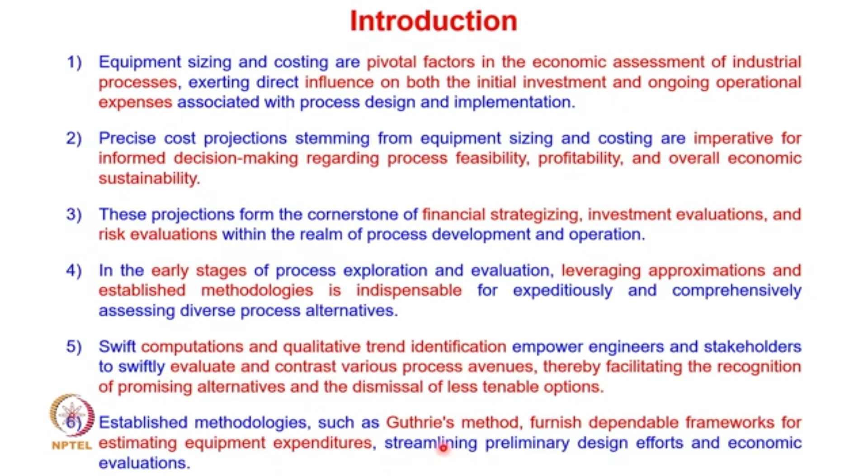If you look at the different estimates, preliminary design usually has around less than 40% error. This is attributed to the limited level of detail available during preliminary design. Despite this, it is important to have, primarily because even the order of magnitude estimate serves as a valuable tool for assessing the feasibility of various process alternatives. So even though preliminary design has almost 40% error, it is still important.

As the process design progresses into later stages, a study estimate is utilized. Study estimates have an error of less than 25%, giving refined cost approximations with a reduced error margin. This estimate offers greater precision, primarily because of the acquisition of more detailed information during the development process.

As we further go ahead in the advanced stages of process development, we have a preliminary estimate, where the error is less than 12%, reflecting a higher degree of accuracy. This indicates a more precise assessment of the capital cost based on comprehensive design data.

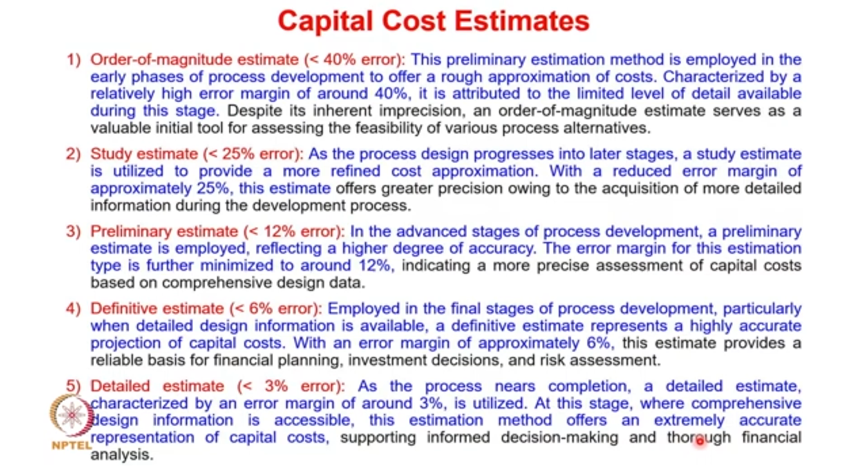As the process design is more or less complete, a detailed estimate is characterized by an error of less than 3%. At this stage, comprehensive design information is accessible, and this estimation method offers an extremely accurate representation of the capital cost, supporting informed decision making and thorough financial analysis.

Equipment sizing is crucial for determining the physical attributes and specifications of various process units, ensuring optimal performance and cost effectiveness. Accurate equipment sizing is essential for achieving efficient operation and meeting process requirements.

There are four different types of sizing primarily taken into consideration: vessel sizing and specification, heat transfer equipment sizing, distillation and absorption column sizing, and finally the sizing of compressors, pumps and refrigeration. We are going to look at each of these four types of sizing and specification in a little more detail.

So let's look at the vessel sizing and specification. Calculation of vessel size and specification is conducted by considering various parameters. We look at the flow rates, temperatures, pressure and material compatibility. This process involves meticulous consideration of factors such as vessel capacity, height, cross sectional area and pressure to ensure optimal performance and safety.

Similarly, for heat transfer equipment, the sizing calculations are based on the heat duties required, the temperature difference present, and the fluid properties. Typically, engineers determine the appropriate heat transfer surface areas and dimensions to effectively meet the process heat exchange requirements, while considering factors such as fluid flow characteristics and thermal conductivity.

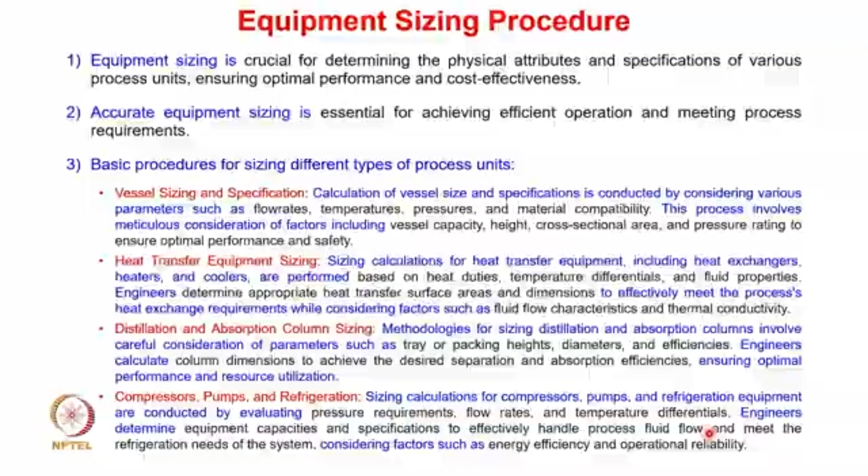So let us start with the vessel sizing. Vessels are an important component in many chemical processes. Vessels like reactors and tanks, all these we are considering as vessels, and their sizing and costing are critical for economic evaluations of the candidate flow sheet. So selecting the vessel volume is important. It is based on how it is calculated.

Usually to calculate the vessel sizing, we assume a 5-minute liquid hold up time, with an added equal volume for the vapor flows. So we get the volume equals to 2 into FL into tau divided by rho L. Here FL is the liquid flow rate, tau is the residence time, rho L is the density of the liquid, and 2 is added because we assume an equal volume for the vapor flows. So in this equation we put tau equals to 5 minutes, and based on that we can calculate V, which gives us the vessel volume.

In this case we also make different assumptions, like the aspect ratio L by D is assumed to be 4 for general costing purposes. What does it reflect? It reflects that we are considering the cost of the bottom and top caps as 4 times that of the side. So that is what we are assuming when we take L by D equals to 4.

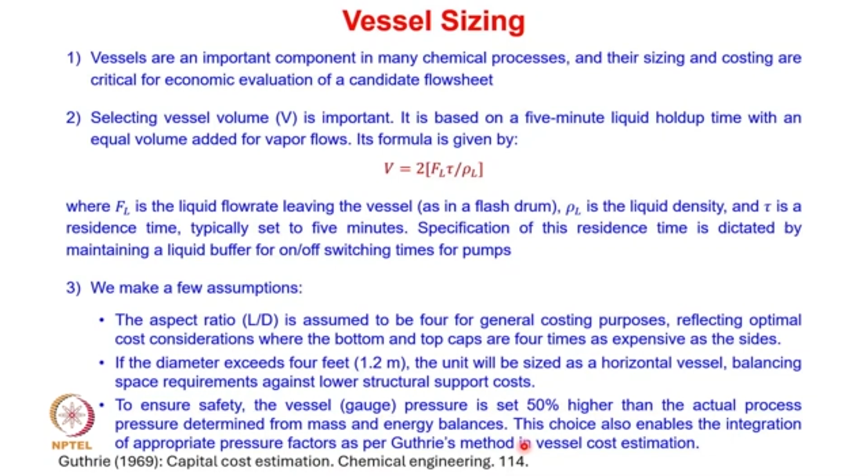For vessel sizing, consider the required material of construction as shown in the table. This particular table shows which material is most suitable for different temperature ranges, and is taken from the source, A Systematic Method of Chemical Process Design by Biegler, Grossmann and Westerberg.

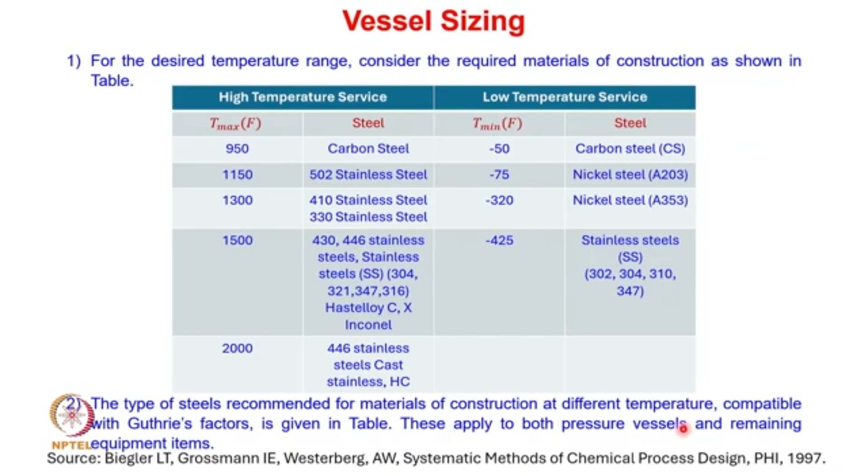When the temperature is around 950 Fahrenheit, the best material to work with is carbon steel. If the temperature is around 1150 Fahrenheit, then it is 502 stainless steel. So based on what temperature we are looking at, which material is best is what is given in this table. The type of steel recommended for material of construction at different temperatures, compatible with Guthrie's factors, is given in this table. These apply to both pressure vessels and remaining equipment items.

Whenever we are doing vessel sizing, the fundamental configuration for pressure vessels typically comprises a carbon steel vessel designed for a pressure of 50 psig, featuring standard nozzles and manways. This configuration serves as an initial reference point. Whenever we have additional information, only then do we change this specification; otherwise we start with a base design of pressure requirement of 50 psig. This reference point, for both sizing and cost estimation, can be adjusted as per specific process requirements, whenever additional requirements are there.

Vertical construction entails a cylindrical shell with dished heads positioned at both top and bottom, whereas horizontal construction involves a cylindrical shell, two dished heads, and two saddles for support. You can see that with horizontal design, these additional saddle supports are required. So in horizontal construction, the assembly includes the shell, two heads and two saddles.

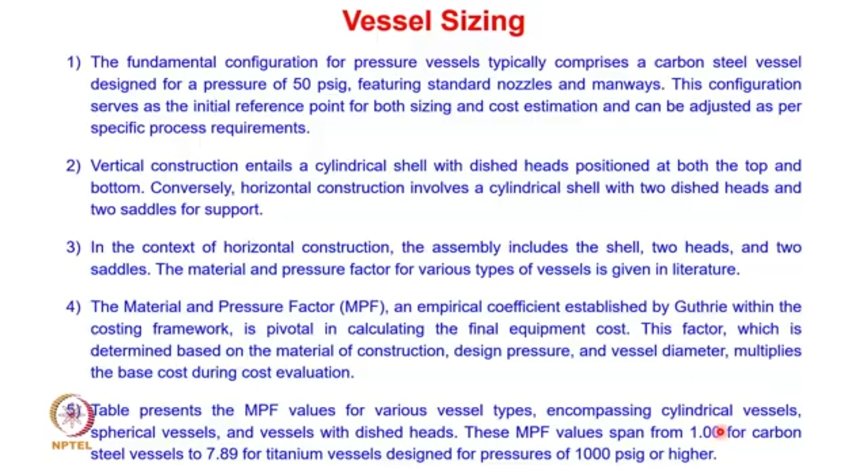If we go from low pressure to high pressure, we move from carbon steel to titanium, and the material and pressure factor increases from 1 to 7. If I am using carbon steel only as a cladding material, the increase is lower compared to when using the entire solid material. For instance, with carbon steel, the factor is 1, and as we go from carbon steel to titanium as a cladding material, it increases from 1 to 4, whereas if used as a solid material, it increases from 1 to 7.

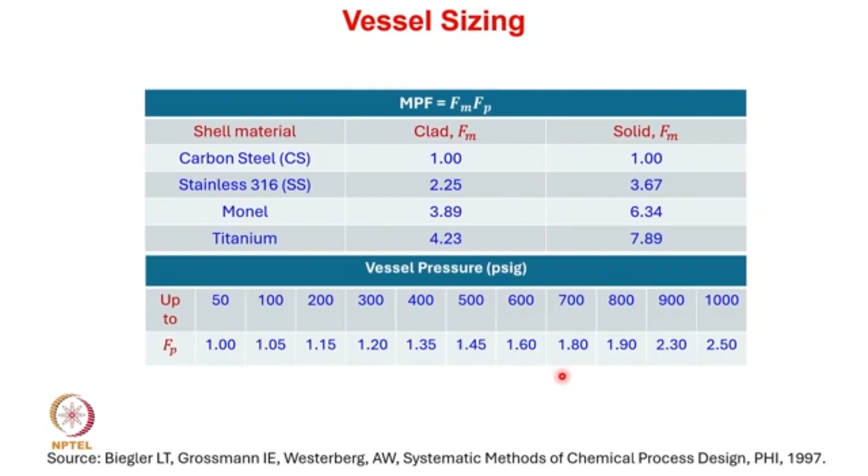Also, the pressure factor increases as the pressure value increases from 50 psig to 1000 psig. You can see that the pressure factor is increasing from 1 to 2.5, and all these have an impact on the cost calculations. Now coming back to the next type of equipment sizing.

The typical expression used for calculation here is the heat transfer Q, given as UA delta T LMTD, where U is the overall heat transfer coefficient, A is the heat transfer area, and delta T LMTD is the log mean temperature difference.

This overall heat transfer coefficient is an empirical parameter that depends on the type of fluid, the flow rates, the geometry of the exchanger, and other factors. We can calculate this U using empirical correlations, by combining the inside heat transfer coefficient, outside heat transfer coefficient, and the geometry, and use that in this equation.

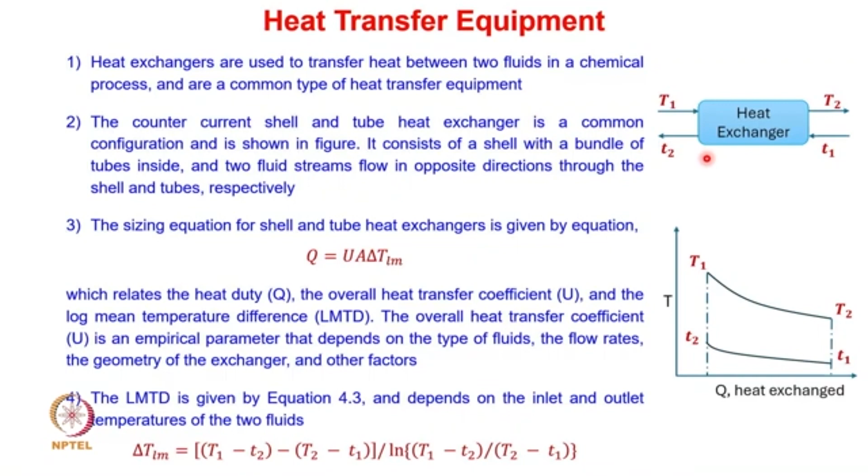The log mean temperature difference is primarily used because this temperature difference varies as we move from one end of the heat exchanger to the other. To accommodate this variation in temperature, the log mean temperature difference is used.

Another complication which comes across while designing or doing cost calculations for heat transfer equipment is whenever a phase change is taking place. Phase change is commonly seen whenever there is condensation of one fluid or evaporation of one fluid happening. In that case, we calculate the U value in a slightly different way.

In this case, the exchanger can be split into serial units, and the U values for each unit can be calculated separately. For instance, here you can see that the hot fluid is exchanging heat and then condensing. From this point onwards, the temperature remains almost the same, which is Tc. So one fluid is exchanging heat as sensible heat initially, and then there is a latent heat exchange.

Whereas if you look at the other fluid, the temperature is continuously increasing as we move from point 1 to point 2. So you can see that we can have two sequential parts here.

Just for the sensible heat transfer, this initial part we take as part 1, whereas the second part where condensation is taking place primarily, we take as part 2. We calculate the heat transfer area for both these parts, and then sum them up.

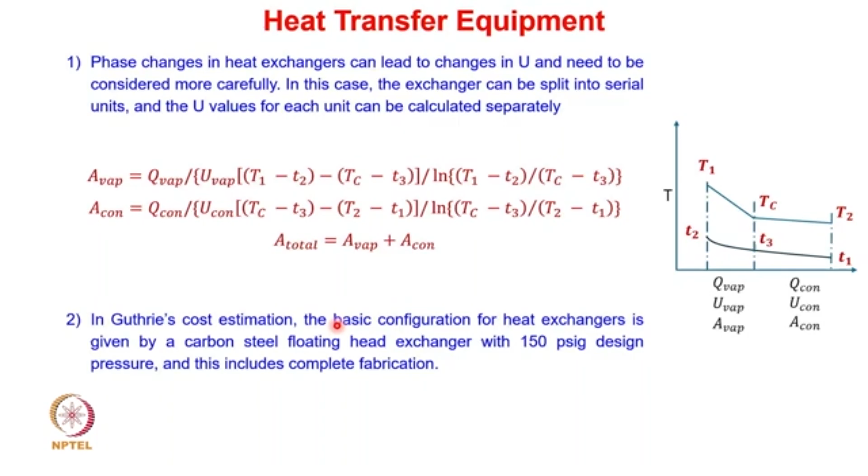In Guthrie's cost estimation, the basic configuration for a heat exchanger is given by a carbon steel floating head heat exchanger with 150 psig design pressure, and this includes complete fabrication. We can use this information in Guthrie's cost estimation method to calculate the cost associated with the heat exchanger.

Now let's extend our discussion to the next unit, which is a reactor. The sizing of the reactor involves determining the space velocity. Space velocity is nothing but how much volume we are processing in the reactor per unit of time.

Based on the molar flow rate of the liquid or gas, if it is denoted by mu, then we can calculate the space velocity using this equation.

So space velocity is given as 1 by space time, so that is given as 1 by tau. Here tau is the space or residence time, and that is given as mu divided by rho v cat. Here mu is nothing but the molar flow rate of liquid or gas, and rho is the molar density at standard temperature and pressure, whereas v cat is the volume of the catalyst. So based on this equation, we can calculate the space velocity S.

So the total volume of the reactor V is calculated considering the void fraction. Whenever we have a packed reactor, we calculate the volume V by considering the void fraction of the catalyst particles in the reactor, let's say epsilon, and the value of epsilon is typically taken as 50%. So we can calculate V as V catalyst divided by 1 minus epsilon, where if I put 0.5 for epsilon, I get V equals to 2 into V catalyst.

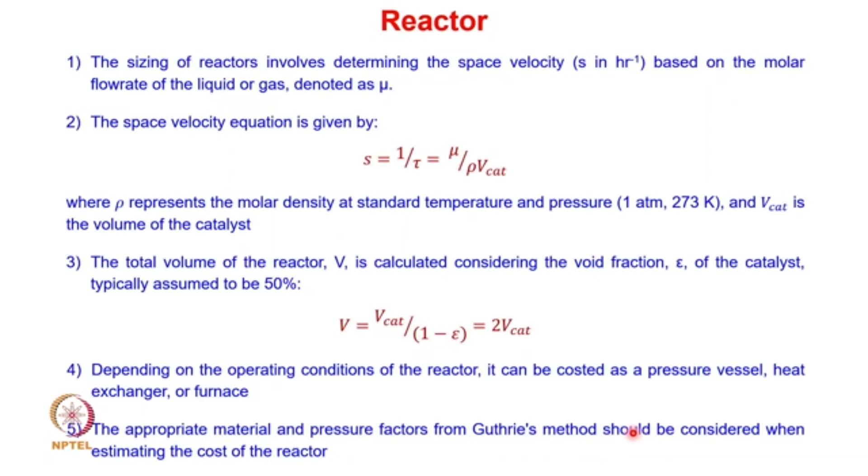Now let's extend our discussion to the next type of equipment like distillation columns and absorption columns. The sizing process for distillation columns entails the determination of height, what should be the diameter of the column, and how many trays are there within the stack. These are the important decisions we have to make when sizing the distillation column.

If you are taking a tray stack, you can see that in Guthrie's methodology, this features a standard configuration comprising 24-inch trays constructed from carbon steel. These trays can be of plate, sieve or grid type and include necessary fittings and supports.

So to facilitate costing of the vessel, tray stack, and associated heat exchangers, it is imperative to first compute the number of theoretical trays and establish the reflux ratio. When sizing the distillation column, the most important point is how many theoretical trays are required and what is the reflux ratio that we have to calculate.

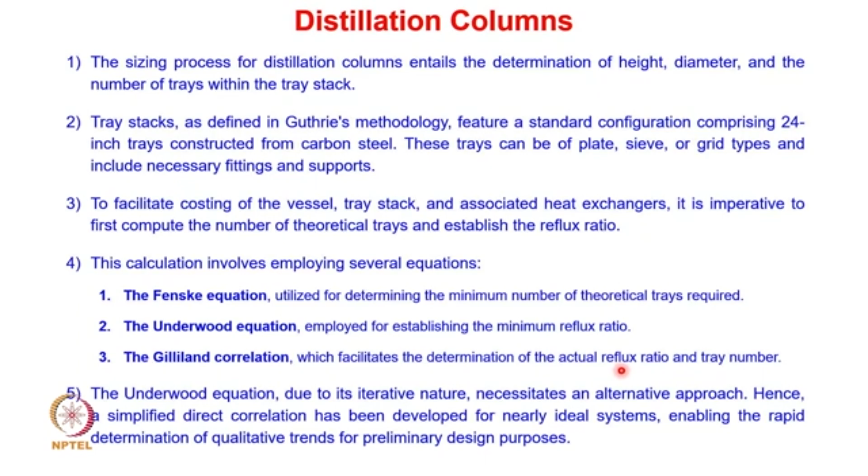The third important equation is, once we calculate the minimum reflux ratio and minimum number of theoretical trays required, we can use the Gilliland correlation to calculate what will be the actual reflux ratio and tray numbers.

So the correlations are given here. Determining the tray number and reflux ratio comes from the mass and energy balance. Remember, in the last session we performed the mass and energy balance around the distillation column, and by doing that we fix the relative volatilities, the split fraction at the top, and the bottom recoveries. So we usually know these values, we know alpha Lk by Hk, which is the relative volatility of the light key component with respect to the heavy key component.

Beta Lk is nothing but xi Lk, which is the split fraction of the light key component. Similarly, beta Hk is the split fraction of the heavy key component. These values are already known from the material and energy balance.

We can use these split fractions and relative volatility in the correlation. The first correlation is with respect to Ni, where we calculate the number of trays. Here, I can be the low key component or high key component, and based on that we calculate the maximum and minimum values of the trays required.

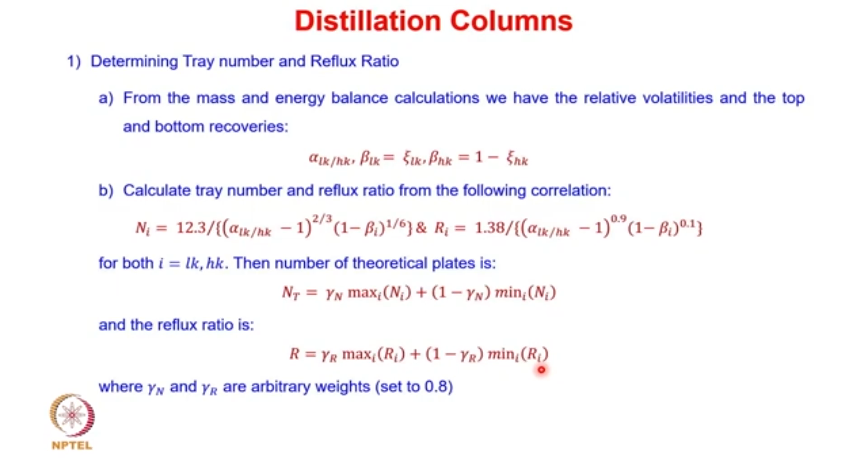When the feed is at the bubble point condition, the entire feed is mostly liquid, so the liquid comes down, trickling from the feed tray to the bottom. Whereas when the feed is at the dew point, it essentially involves vapor, so it goes up. Based on this, we need a different calculation.

The important calculation in the distillation column is to calculate the diameter. Calculation of the height of the distillation column involves comprehensive consideration of various components including trays, reflux ratio, and operational parameters. As we calculate the number of trays, reflux ratio, and operational parameters, we can calculate the height of the distillation column.

Once the reflux ratio and feed compositions are determined, the flow rates within the distillation column can be computed, and then using these flow rates and an established relationship for flooding velocity, the column diameter can be calculated. We usually want to operate the distillation column at 80% of the flooding velocity, so to maintain this 80% flooding velocity, we find the appropriate diameter. This is how we calculate the diameter of the distillation column.

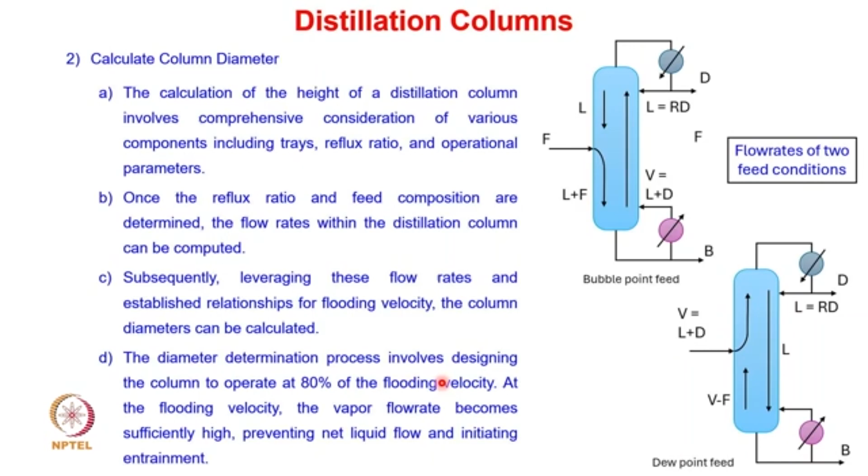So these are the correlations which are used to calculate the column diameter. We define UNF as the linear flooding velocity, required for the diameter calculation. This is given as CSBF times the bracket of rho L minus rho G divided by rho G, raised to the power 0.5, into 20 by sigma raised to the power 0.2. Here, rho G and rho L are the gas and liquid mass densities, and sigma is the liquid surface tension in dynes per cm.

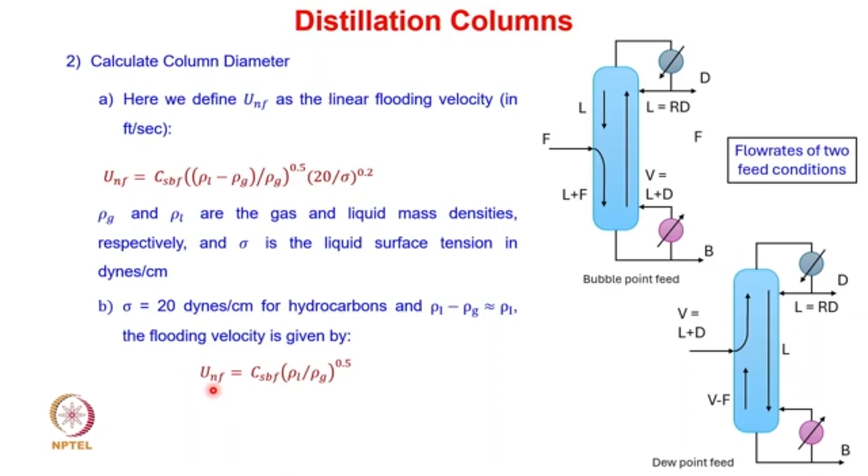If we are separating hydrocarbons, typically the surface tension taken is 20 dynes per cm. If we put sigma equals to 20, that part of the equation is eliminated, and also rho L minus rho G is typically approximately equal to rho L. If we substitute that, the original equation simplifies immensely, and we obtain UNF given as CSBF into rho L by rho G raised to the power 0.5. This equation can be used to calculate the linear flooding velocity.

So now let us look at how we can determine the tray stack height.

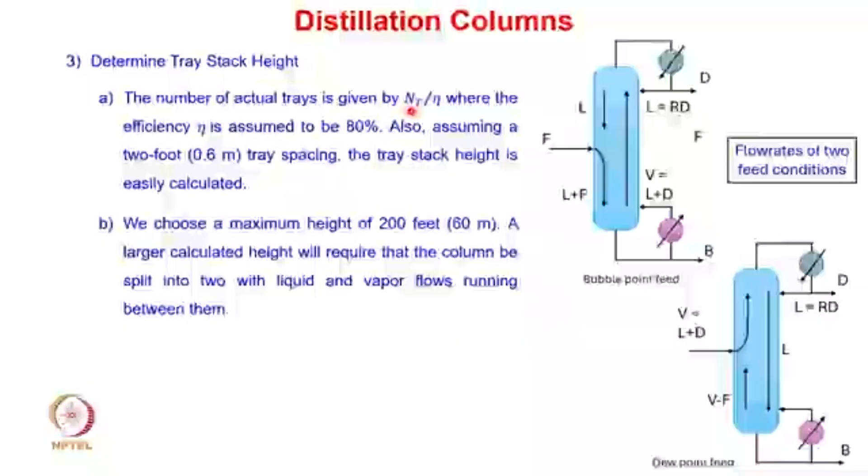So the number of actual trays is given by using the efficiency in the considerations. Typically the efficiency of the separation is taken around 80%, so NT, the number of theoretical trays required, divided by efficiency, gives us the number of trays required.

Once we know the number of trays required, assuming a 2 feet tray spacing, we can calculate the height of the distillation column. We choose the maximum height around 200 feet, so if the height of the distillation column comes out less than 200 feet or 60 meters, then it is okay.

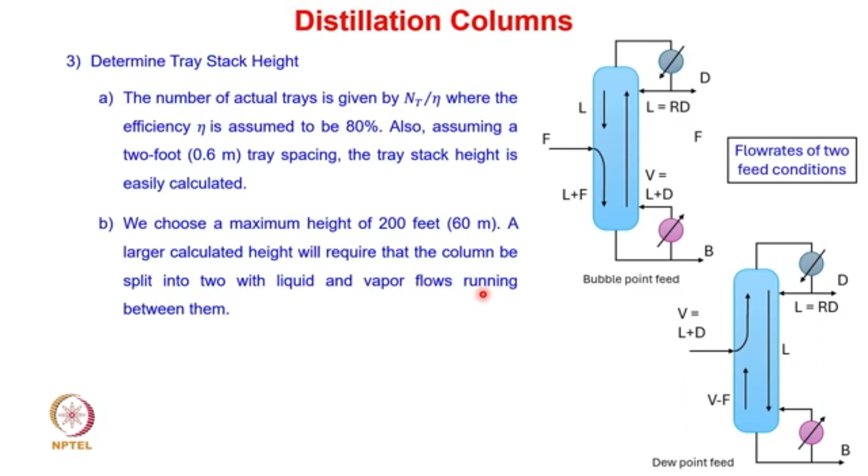If it is going beyond that, then we can split it into different columns. A larger calculated height will require that the column be split into two, with liquid and vapor flows running between them. So the height of the distillation column should be less than 60 meters for all design purposes. That is what we ensure.

Now let's extend our discussion to another separation unit, the absorber. In an absorber, we use a similar methodology as for the distillation column, but there is a slight difference: the efficiency of the absorber is much lower compared to the distillation column. Absorber column sizes are determined using methods similar to distillation columns, taking into account factors such as flow rates, compositions, and operating conditions.

The number of trays in an absorber column is typically derived from the Kremser equation, which we looked at in the last session. Based on that, we can calculate the number of trays, considering factors such as relative volatility and component recoveries. A low efficiency assumption is often used, as equilibrium on trays is generally considered to be poor.

So whenever we are trying to find out the cost related to absorbers, the efficiency value is important, because typically the efficiency of absorber columns is much lower compared to distillation. The height and diameter of the absorber vessel and tray stack are costed in a manner comparable to that of distillation columns, ensuring the equipment meets the required specifications for efficient operation.

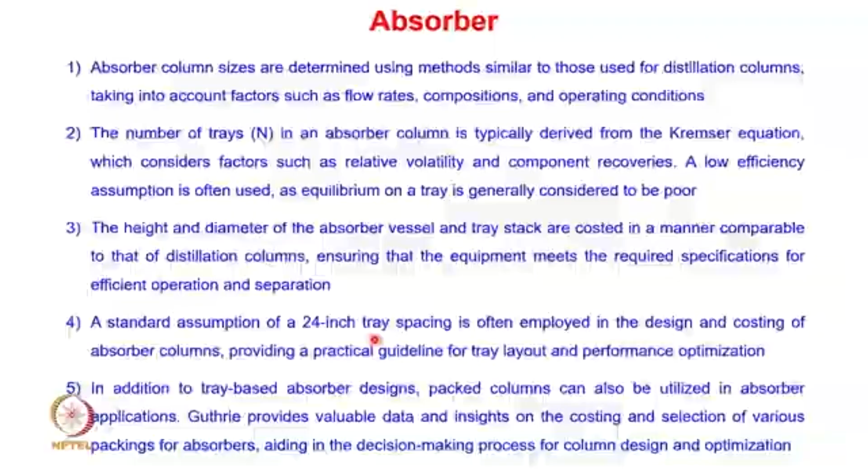A standard assumption of 24-inch tray spacing is used, same as the distillation column. So 24-inch tray spacing is required, and we can calculate the minimum number of trays. We keep this spacing between each tray as 24 inches, and based on that we can find the height of the absorber column. Accordingly, we can perform the costing of the absorber column. This provides the practical guideline for tray layout and performance optimization.

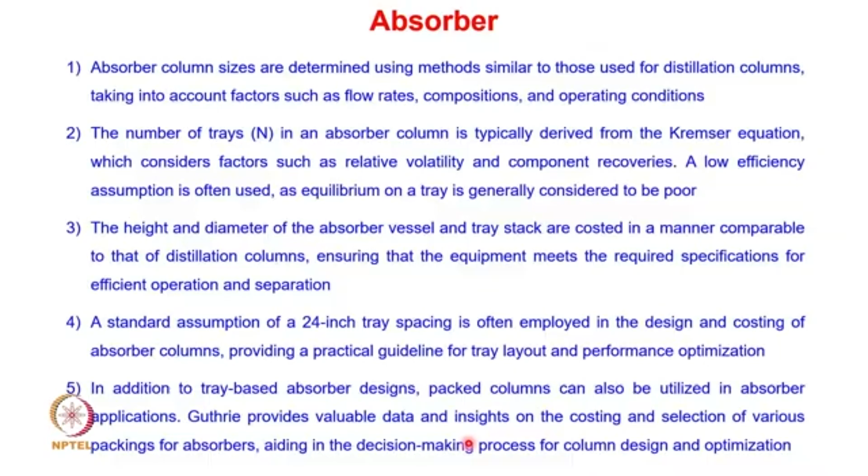In addition to tray-based absorber designs, if the absorber column is a packed bed, we can use the same Guthrie cost methods. This gives us valuable data and insights on the costing and selection of various packings for absorbers, aiding our decision making. Depending on what packings are used inside the absorber column, different cost factors are included, and based on that we can calculate the cost associated with the absorber columns, and these design values can then be used for optimization.

Now extending the discussion to other equipment like pumps. The theoretical work for pumping liquid is typically calculated as V delta P, that is, the pressure drop across the pump multiplied by the volume we are handling. Based on that we can calculate the theoretical work required by the pump.

The brake horsepower for the pump can be determined using the formula. All pumps are usually specified in terms of horsepower; if you go to the market and buy a pump, it is given in terms of horsepower. We calculate the rating of the pump in horsepower as mu into delta P divided by rho, np, eta P, and eta M.

Here mu is nothing but the molar flow rate, whereas P1 and P2 are the upstream and downstream pressure, so P1 minus P2 is the pressure drop across the pump. Rho is the density, eta P is the efficiency of the pump, and eta M is the efficiency of the motor. Based on that we can calculate the horsepower of the pump.

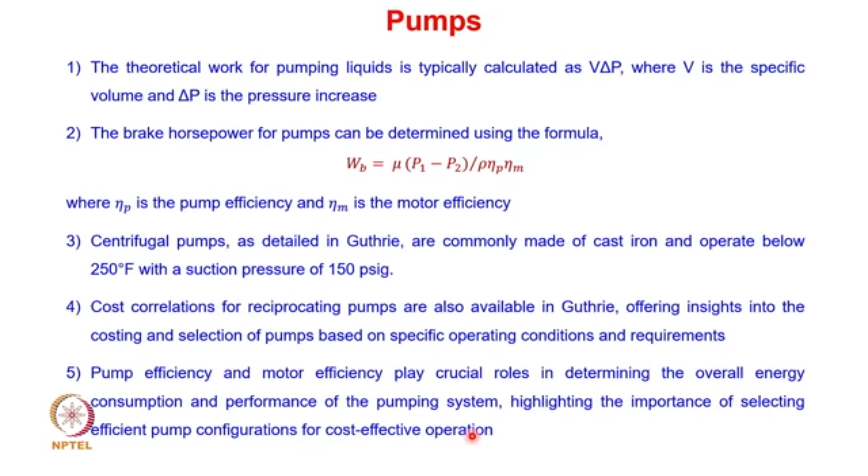Now let us extend our discussion to other equipment like compressors and turbines. Ideal assumptions are made for gas compression in sizing the compressors and turbines, so we assume that the gas is ideal. We can divide these equipment into centrifugal compressors or reciprocating compressors. With relatively high capacities and low compression ratios required, we use centrifugal compressors. When we are looking at low capacities and high compression ratios, we use reciprocating compressors.

If you are looking at an adiabatic compressor, the ideal compression work can be calculated from the change in enthalpy, so the work can be given as mu into delta H. Here mu is the molar flow rate, whereas H is the enthalpy of the vapor or gas, and delta H is the change in enthalpy. Assuming an ideal system, delta H can be given as Cp dt, so we can write W as mu Cp dt, that is mu Cp into delta T.

This Cp value for the ideal gas can be represented in terms of the heat capacity ratio, Cp by Cv. So this is given as mu into gamma divided by gamma minus 1, into R delta T. Here gamma is Cp divided by Cv, and it is taken as 1.4 for the ideal system, and R is the universal gas constant.

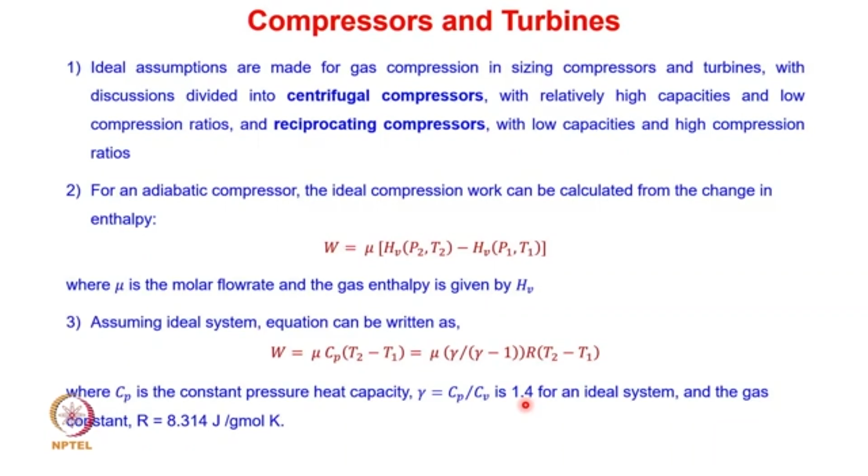Substituting this temperature in the earlier equation, we get the expression for the work W, given as mu into gamma divided by gamma minus 1, into R T1, in the bracket P1 by P2 raised to the power gamma minus 1 divided by gamma, minus 1. This is the equation we have to use when we are looking at the work required, the theoretical power required for the compressor.

When assessing the efficiencies of compressors or turbines, a standard practice is to select the efficiency value eta equals 0.8 for compression and for expansion work efficiency. For a compressor driven by a shaft driven electric motor, the efficiency value is 0.9. But when using the standard practice where eta is 0.8, if the turbine is used as a driver, then the efficiency value is 0.8.

Consequently, the actual horsepower for the compressor is calculated using this equation. Once we get the theoretical power required, W, we divide by eta m and eta c, where eta m is the motor efficiency and eta c is the compressor efficiency. Taking that into account, we can calculate how much horsepower is required for a particular compressor, because then we can buy the compressor with that specification from the market.

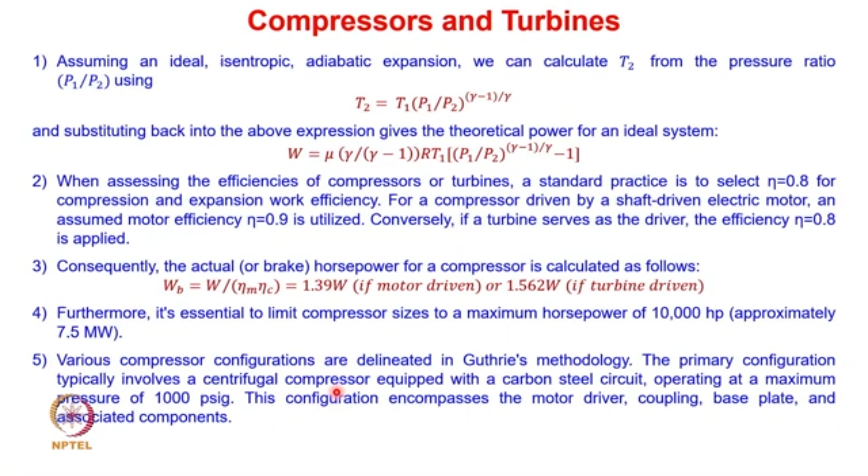Now remember that when we are using compressors, we assume that it is adiabatic compression. Typically because of the compression, the temperature increases, and we don't want the temperature of the equipment going beyond a particular limit. So in order to eliminate this problem, typically the compressors are used in a staged manner. We don't use one big compressor; instead, we use several smaller compressors in a staged manner.

Staged compressors are utilized to achieve a desired increase in gas pressure with reduced work requirement by incorporating intercooling between the compression stages. So we can intercool the units. Again, isothermal compression is physically unrealistic, because whenever you are compressing a particular gas, it is going to increase the temperature. So that is also one reason why staged compressions are required.

The stage compressions showcase the efficiency improvement achieved through intercooling. If you are having intercooling, then we can have higher efficiency. For a fixed number of compressors, maximizing work requirement reduction in staged compression occurs when the compression ratios are equalized across the stages. So the efficiency increases if you are using all these compressors with the same compression ratio.

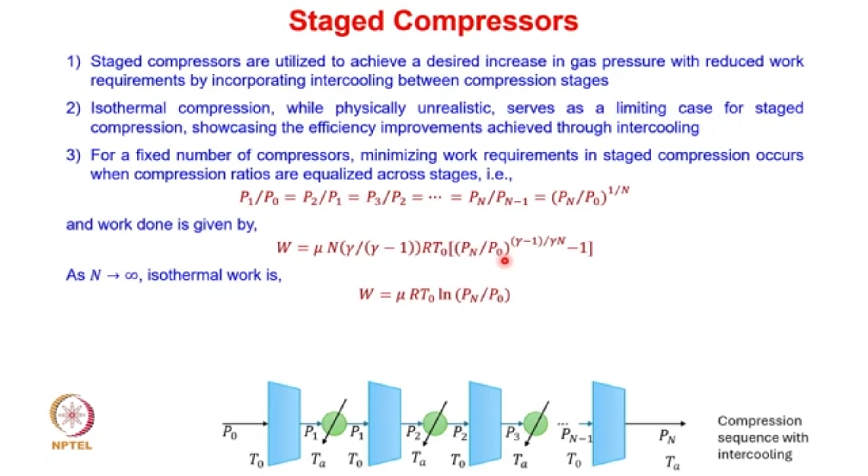The theoretical power for reciprocating compressors can be calculated based on specific equations considering factors like clearance and compression efficiency. The equation used for calculating the work required is the same as seen earlier, except that the entire equation is divided by one more factor, which is 1 minus C into P2 by P1 raised to the power 1 by gamma minus 1. So this additional factor is divided with respect to the previous equation in reciprocating compressors.

The selection between centrifugal and reciprocating compressors depends on factors such as gas flow rate and desired pressure increase, with guidelines available in references like Perry's handbook.

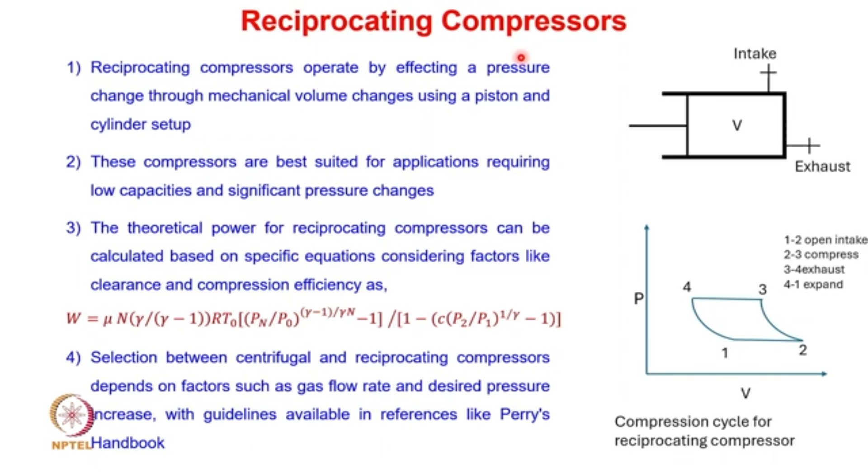If you look at reciprocating compressors, there are four stages required. In the first stage, in the compression cycle between points 1 to 2, we open and take the gas inside. From 2 to 3 we compress the gas, then from 3 to 4 we exhaust the gas, and from 4 to 1 there is expansion taking place. All these four stages are involved when looking at reciprocating compressors.

Now looking at another interesting aspect in cost calculation which is important in process application: very often we require some chemicals to be kept at a lower temperature. For example, in the production of ammonia, the nitrogen gas is usually kept at a lower temperature, and hydrogen is kept at a lower temperature. In such cases we require refrigeration. Refrigeration is essential when a process stream needs to operate below approximately 300 Kelvin, requiring consideration of a refrigeration cycle.

The refrigeration system may need to be designed to cool a stream with a focus on balancing capital and operating cost by selecting the appropriate number of refrigeration cycles. The pressure enthalpy diagram is a valuable tool in understanding the heat absorbed from the process stream and the heat per unit mass of the refrigerant in the refrigeration cycle. Q is the heat absorbed from the process stream at a sub-ambient temperature, and Q dash is the heat per unit mass of refrigerant. A single cycle requires the maximum work and cooling water QC, while a large number of cycles require minimum work and QC.

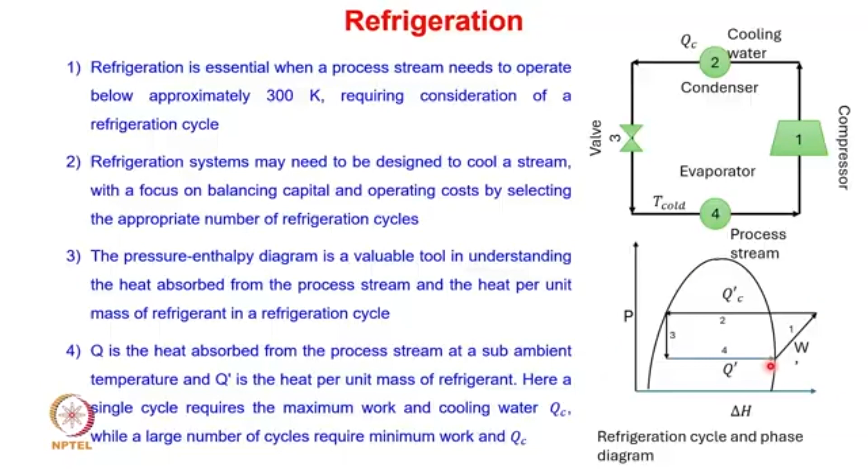If you look at the pressure and enthalpy diagram, this is what is happening. In the first stage when compressing, you can see the pressure is increasing, so enthalpy as well as pressure both are increasing. In the second stage we are cooling, so the temperature decreases and delta H decreases. In the third stage the throttling is taking place, so volume is increasing and pressure is decreasing, moving from 3 to 4. In the fourth stage evaporation happens. With this cycle we can perform the refrigeration and reduce the temperature of the process stream.

The coefficient of performance is the important factor when we look at the cost estimation of refrigeration. Whenever we want to look at the performance of refrigeration, the important factor one has to look at is the coefficient of performance, which is defined to relate the work and the heat rejected in the refrigeration system, with typical guidelines suggesting a coefficient of performance around 4 for design purposes.

So COP here is given as Q dash by W dash. For a typical cycle, W is given as Q by 4, and QC is given as W plus Q equals 5 by 4 Q. For the compressor driven by an electric motor, we can calculate WB, which is nothing but the work required, given as W by eta M.

So eta M is the motor efficiency, and eta C is the compressor efficiency. We can use these values to calculate WB.

Another important point is that there are several constraints which we need to satisfy when performing refrigeration. The refrigerant must remain below the critical point in the condenser, so T condenser maximum should equal 0.9 TCR.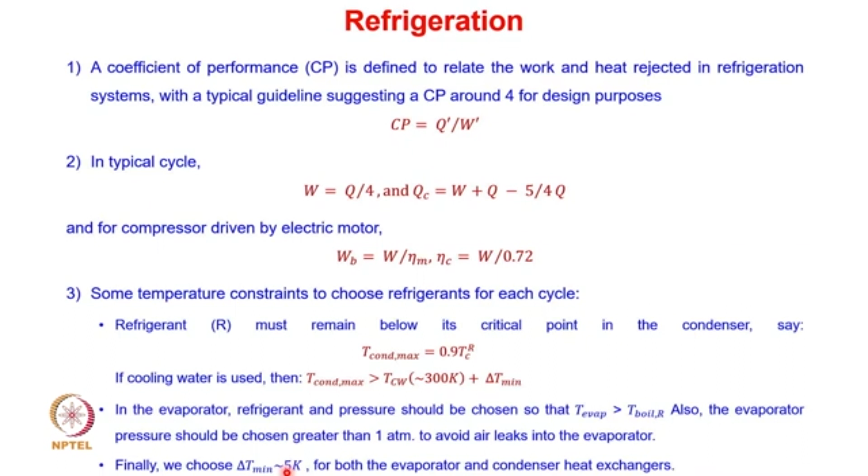Finally, we choose the temperature drop around 5K. When going for heating, the temperature difference usually used in heat transfer calculations is 10 degrees, whereas for refrigeration, the minimum temperature difference required is around 5 degrees or 5 Kelvin. So for both the evaporator and condenser, we require a delta T of 5 Kelvin.

Cost estimation: so far we have seen how to calculate the size of different equipment. Now we will look at how we can calculate the cost for different equipment. You can see that equipment cost increases non-linearly with equipment size or capacity, and can be expressed using a power law expression, so we can calculate the actual cost.

C is given as C naught into S divided by S naught, raised to the power alpha. Here the exponent can be less than 1. S naught and C naught are the base capacities and cost. So if you know the base capacity and cost, for a new value of capacity we can calculate what the cost will be. For different equipment, this value of alpha is defined, and we can find these exponent values from the literature.

This non-linearity reflects an economy of scale, where incremental cost decreases with larger capacity. So if larger capacities are involved, the cost increases at a lower rate. Based on that, non-linear equations are used here.

For pressure vessels, service capacity is related to volume while the cost is linked to the weight, that is, the weight of metal required. Remember, when making pressure vessels, how much material is required is important, and that is reflected in the cost, which is proportional to the surface area.

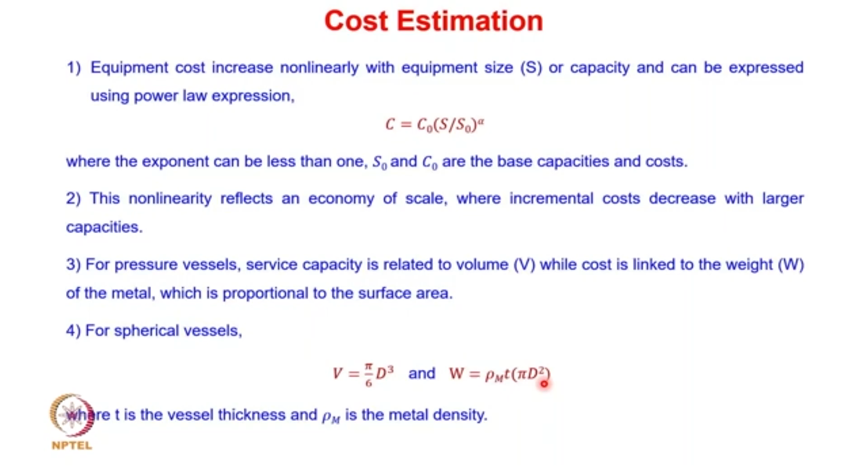If I put the diameter into this equation, you can see that the cost is proportional to the weight, and it is proportional to the volume raised to the power 2 by 3. So it is proportional to the area, but when we are dealing with volume, it is proportional to volume raised to the power 2 by 3 — it is not directly proportional. So it is non-linearly related to the volume, but directly related to the area.

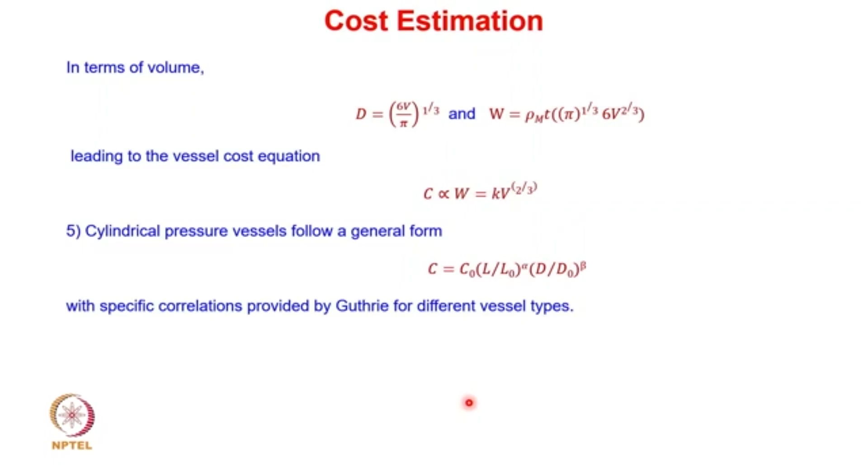For cylindrical pressure vessels, both length and diameter are important, and therefore the cost is calculated as C naught into L by L naught raised to the power alpha, into D by D naught raised to the power beta. Here alpha and beta are the exponents which we find from the literature. L naught and D naught are the base length and base size for which the cost is available, but for any other length and diameter, we can calculate the cost using this equation.

Additionally, if you look at Guthrie's, it uses log charts to represent the cost. In Guthrie's cost estimation book, you can see that log C versus log S is represented. The cost is represented as CB, which is a base cost, into S by SB raised to the power n, where SB is the base value of the particular variable, like it could be diameter or length.

If we take a log of that, we get log C equals log CB by SB raised to the power n. So this first term is nothing but the intercept, whereas n into log S is there. So n is the slope of the curve, whereas log S is the variable. The log charts given in Guthrie's cost estimation book actually follow this equation, so log C is plotted with respect to log S.

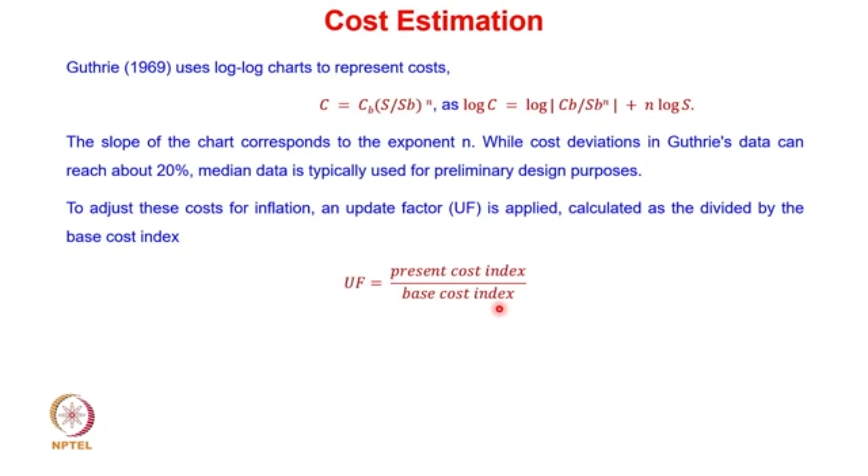The slope of the chart corresponds to the exponent n, while the cost deviation in Guthrie's data, if you look at how much it deviates with respect to actual values, is around 20%. This data is typically used for preliminary design purposes. Again, to adjust this cost for inflation, an update factor is used. Remember, inflation is also going to increase the cost, and for that the update factor is used, which is obtained as present cost index divided by base cost index. This update factor is used when we are calculating the actual cost.

In Guthrie's modular method, it provides a structured approach to estimating equipment cost by considering various factors and cost modules. The method involves breaking down the total cost of equipment into different components, like base cost, module factor, material and pressure factor, and installation cost.

Bare module cost is calculated as the product of the base cost and the module factor. So BMC is given as base cost into module factor. Again, the uninstalled cost is determined by multiplying the base cost with the material and pressure factor. The installation cost is calculated as the difference between the product of the base cost and the module factor, and the base cost. So installation cost equals base cost into module factor minus base cost, which is given as base cost into module factor minus 1.

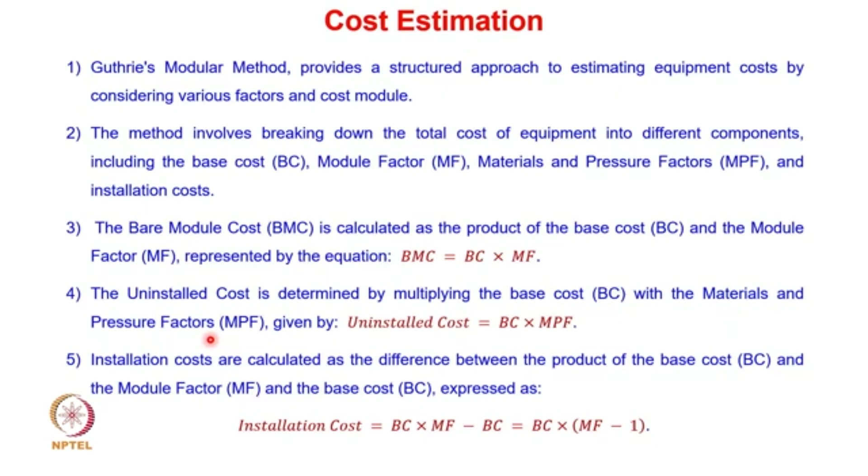The total installed cost is the sum of the uninstalled cost and the installation cost, defined as total installed cost equals base cost into MPF plus MF minus 1. Remember, in this case MF is the module factor, whereas MPF is the material and pressure factor. We can use this to calculate total installed cost as base cost into MPF, which is the material and pressure factor, plus MF, the module factor, minus 1.

The updated bare module cost is calculated using an update factor. Remember, because of inflation we have to account for the update factor to adjust cost from the base year to the present year. So we might have the base cost with respect to a particular year, and we are interested in calculating the cost at the current year. In that case we have to calculate the update factor, and multiply by that update factor.

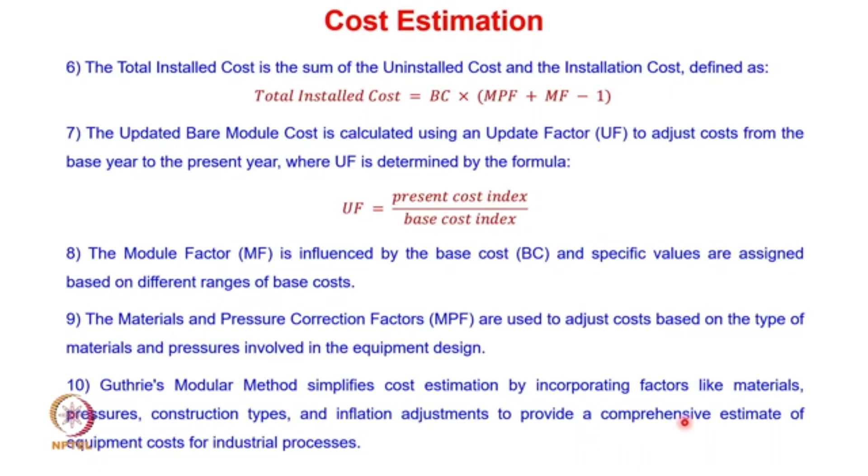The module factor is influenced by the base cost, and specific values are assigned based on different ranges of the base cost. The material and pressure correction factor are used to adjust costs based on the type of material and pressure involved in the equipment design. Depending on what material and what pressure conditions we are using, the cost will increase or decrease. Guthrie's modular method simplifies cost estimation by incorporating factors like materials, pressures, construction types, and inflation adjustment to provide a comprehensive estimate of equipment cost for industrial processes.

You can see that with almost up to 20% error margin, we can calculate the cost for different equipment and installations, and use that for making decisions. So this is all for equipment sizing and cost estimations, and we stop here. Thank you everyone.